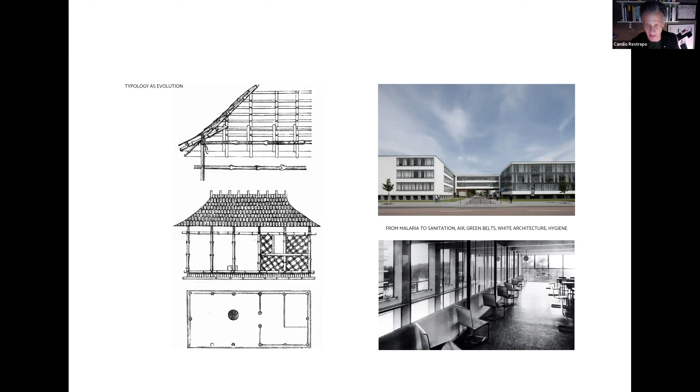At the end of the 19th century, the British troops in India and Asia were struggling, trying to fight malaria, coming from the Italian meaning bad air, or mal aria. This led to the first policies of hygiene and sanitation, which in the end turned out to be what we understand as the first age of modern architecture: white, air, green belt, hygiene, and this idea of architecture meant to heal, to be medical, let's say, to have this possibility. And it took place in the tropics.

So then there are two models that emerge into architecture at the early 20th century. On the left, the idea of igneous architecture that depends on energy basically by burning wood, which is the typical scheme of architecture of Frank Lloyd Wright, with the fireplace in the middle. And then on the right is the heliomorphic, the idea of the relationship with the sun, developed by Le Corbusier after World War II, in relationship with the movement known by many as tropicalism.

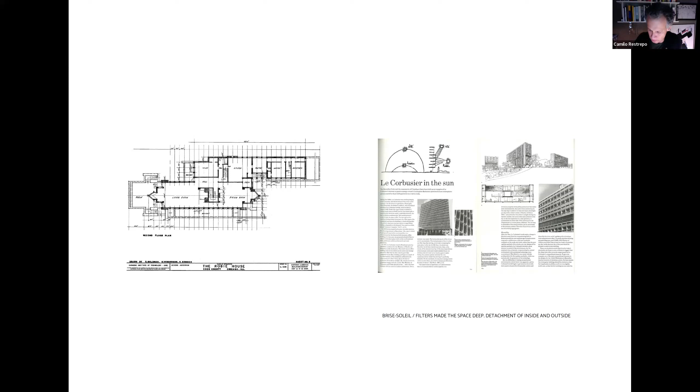Basically derived from the exhibition from MoMA from 1943 called Brazil Builds, where this idea of climate, weather, temperature allowed architecture to detach itself, the facade, from the interior, creating a mediating membrane and producing an expansion of space. Space went from being very thin, of glass and transparent, to becoming thick by the mediation of these elements, allowing this wide threshold to take place between inside and outside.

Tropicalism grew strong in the 30s and 40s around the world, to the point of this masterpiece by Carlos Raúl Villanueva, Universidad Central de Venezuela in Caracas, where all these filters begin to appear, very much in tune with the idea of the primitive hut we were talking about at the beginning, where there are just a few elements to contain and reflect on how to administrate the relationship of air between inside and outside, and what makes inside operate, or what makes an exterior take place.

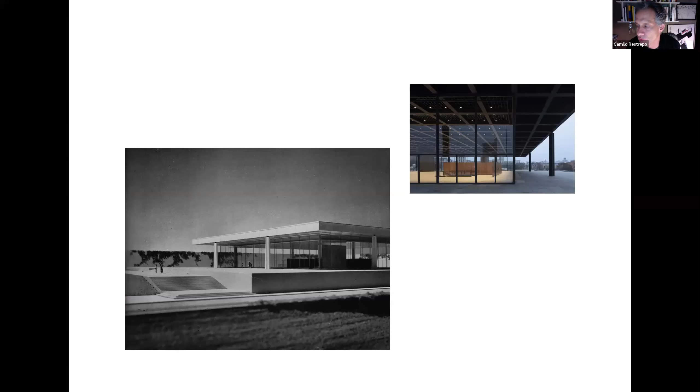With this movement, this idea of tropicalism expanded around the world. It was possible to see projects by Fry in Africa, leading also from the Center of Tropical Studies at the AA in London, even to Mies van der Rohe. It's unbelievable, but the project on the lower left is not the Neue Nationalgalerie. It's actually the Bacardi headquarters in Cuba. So who needs an overhang in Berlin?

So somehow I asked that question, also referring to a brilliant text by Francisco Liernur explaining the relationship between experts and vanguard architects that took place after the 50s, especially with the intervention of Team 10 and the members of CIAM, which I will go to in the next slide. But what's interesting is how this idea of protecting from the sun, of creating these spaces, these forms of transition between inside and outside, even permeated Mies van der Rohe.

So it created a new movement around architecture that wouldn't live long, because then with the emergence of Team 10, specifically after Bridgwater, the meeting at Bridgwater, the former members of CIAM—Le Corbusier, Sert, Gropius, and many others—had become experts. They were working for the US government, trying to expand their policies after World War II for reconstruction.

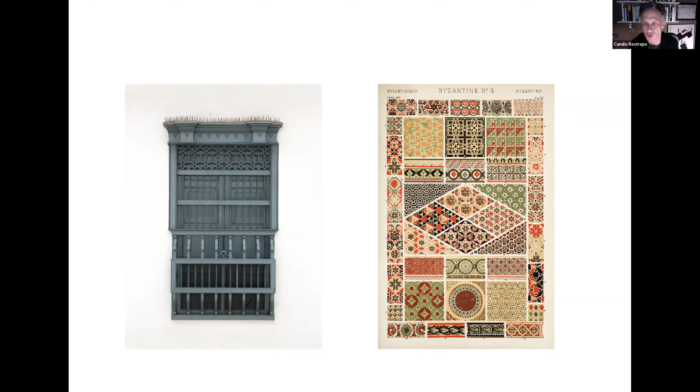And then this idea of the in-between, the space that is not inside, not outside, a dynamic threshold, which I think is the most interesting characteristic of the idea of tropical space.

Here are the characteristics that I guess we need to look at: the idea of the tropical space, that it's porous, dynamic, made of elastic limits, wide thresholds, multi-referential, structure is form, breathes naturally, space made by layers, primitive and archaic, is generous and public, designs relations in space and time, specific elements but ambiguous spaces.

It uses history to redefine the present, negotiates the boundary constantly, it's adaptable, keeping its spatial identity together, is not generic, and typology as an open document to negotiate history and geography. So taking that in mind, I will go very quickly through three of our projects.

First, positioning ourselves. I am positioned in the middle, trying to make a convergence of practice, teaching, and interest in the discipline through writing and research, but also with buildings, by making buildings.

For that, I work sometimes as a guest editor, as in the recent issue by A+U, by a great invitation by Seng Kwan and Angela Pang. On the right is the cover of the forthcoming book we are doing next fall. So I try to be involved in many different activities, not only in designing or building projects.

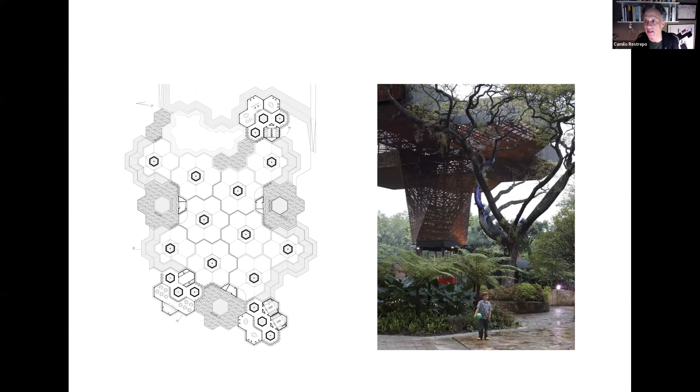The first project is the Orchideorama. It's a canopy located in the Botanical Garden of Medellin. This is a structure that we thought was important and interesting to understand as one module that we call the flower tree, which is this. It's a model of steel, a canopy that begins to negotiate the idea of inside and outside as an extension of a forest. It's an open public space, porous, allowing many different activities to take place.

The second project is a coffee wet mill, a place where coffee gets prepared before being roasted. We were looking at the vernacular architecture of the site, 100 kilometers southeast from Medellin. It's a simple box because it's an industrial facility, but inside we have nested a small community center.

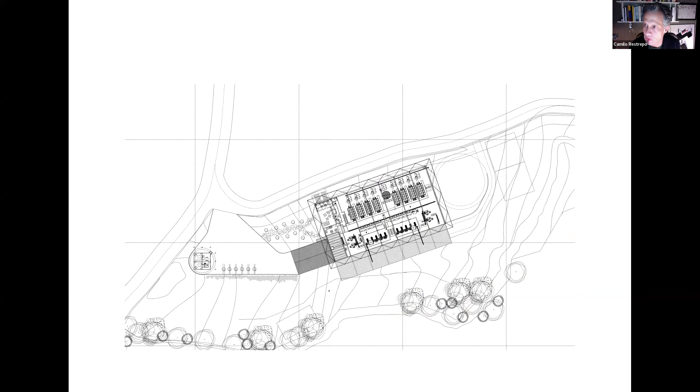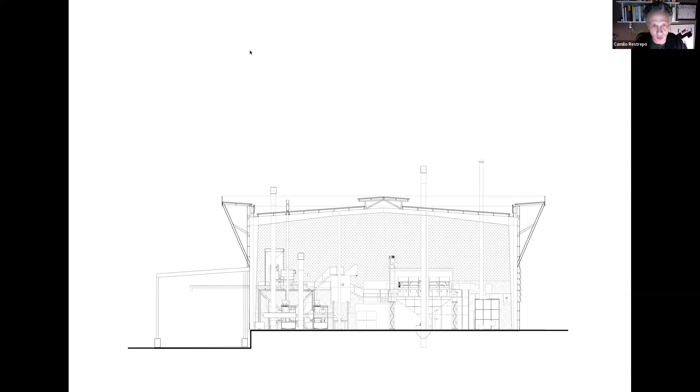This is a very simple section, from left to right and right to left: cold air goes in here and warm air goes out, because it's basically a damp fabric, a vapor fabric, while they dry the coffee grains. The project is also related to all this iconography I was showing you before, of how it was adapted.

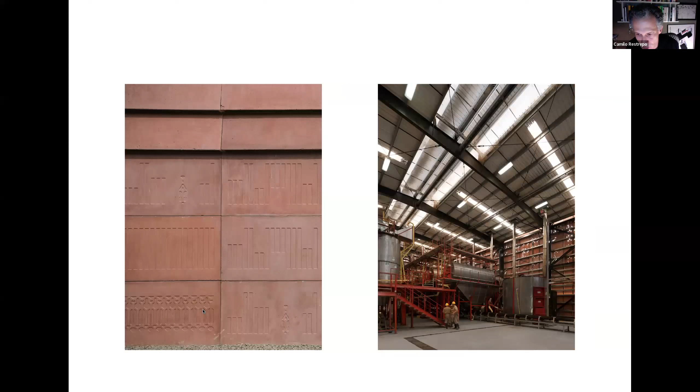With these elements and patterns from Owen Jones, the project is made of panels of GRC concrete, tinted red. On the left image, in the lower part, is the community center. This is the interior, where the air goes out. It's a floating facade, but instead of detaching inside and outside, it's made to breathe, to let the air go through. This is the patterns I was telling you about, and this is the interior of the factory.

The last project is a church in association with Dellekamp Schleich, from Mexico, in Jojutla, Morelos, after the earthquake of 2017. This was the most destroyed town in Mexico during the earthquake. This is what we found, shown on the image on the right: an old church from the late 70s, and some ruins from the 17th, 18th, and 19th centuries. So we had to reorganize the whole complex.

We thought it was interesting to mix two ideas: one, the type of the basilica, to have this connection with the history of a church, or this religious architecture. Also taking into account this typology very typical of Mexico, called the open chapel, that allows people to gather only under a canopy, under a roof, being very democratic.

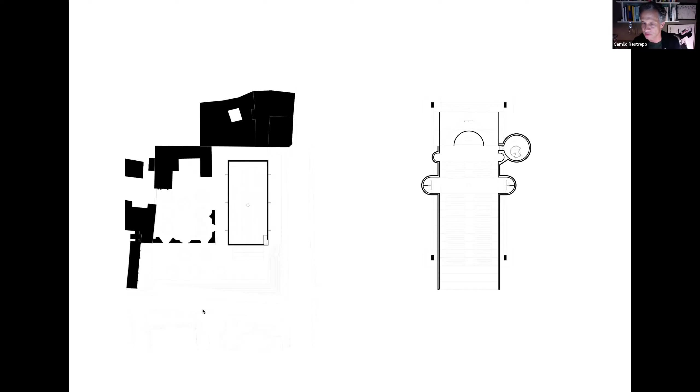Since it was the first infrastructure built in Mexico after the earthquake, we thought it was important to have the type of amphitheater to allow people to gather, not only for mass, but also to allow the community to come together again as a place for gathering.

So this is the church. The church is very simple. It's four columns made of concrete with vaults and arches. The outside, the floor and the ceiling are made of brick, and the structure allows people to be down under the same roof. It plays with the typology, allowing all the apses to be accessible for confessions.

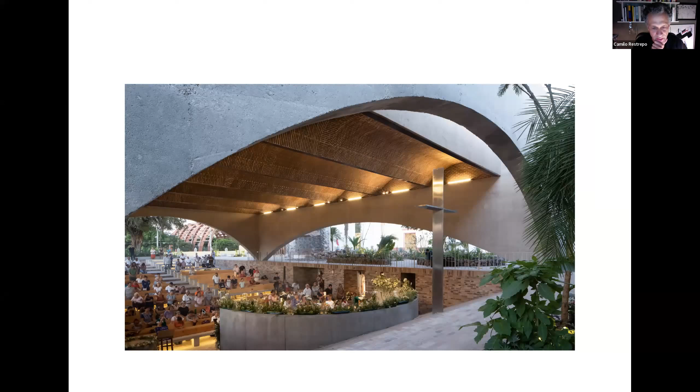As you see, the terrain goes down to allow not only a disconnection with the outside in relationship with the ceremony, but also to make it work as an auditorium, as I mentioned before. This is another view from the inside, showing how it is porous on all sides, and how all the events take place according to the different festivities in relationship with the ruin.

And yes, this is very much it. Thank you very much.

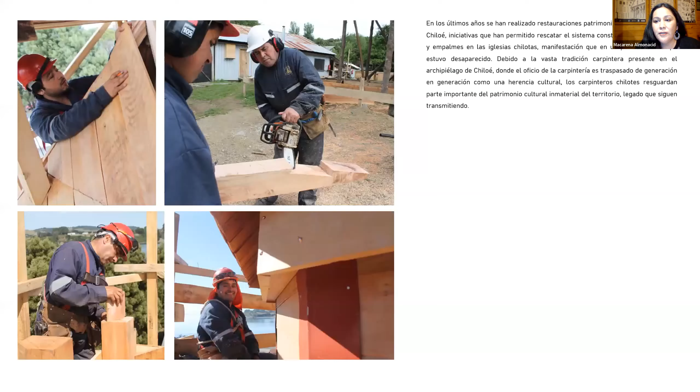Esta iglesia se encuentra en una isla muy chiquitita. Entonces aquí uno de los factores fundamentales fue el trabajo con carpinteros de Chiloé. Ellos son personas que han heredado el conocimiento de sus abuelos, de sus familiares antiguos, tíos. Son parte del patrimonio cultural inmaterial de este territorio, ya que manejan el lenguaje de este material que permitió dar pie a una cultura.

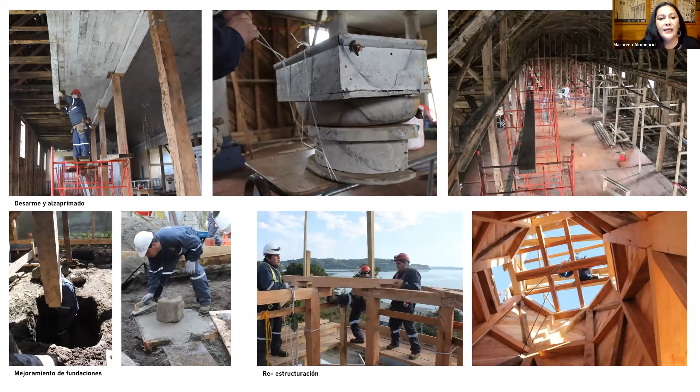Si bien el proceso de una restauración es súper técnico y tiene muchas etapas, nos vamos a enfocar más bien en el trabajo que se ha realizado con las comunidades. Pero acá pueden ver algunas imágenes de las distintas etapas que se desarrollan para restaurar edificios de este tipo, que parte trabajándose primero el desarme y el etiquetado y almacenamiento de todos los elementos que componen los revestimientos interiores.

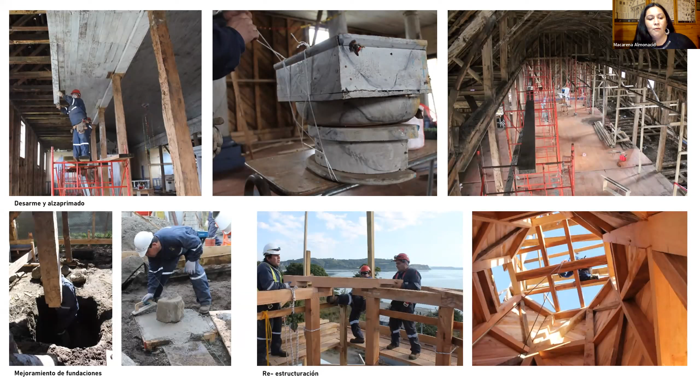Luego se alzaprima, se crea una subestructura para sostener este edificio durante el proceso de restauración. Luego se hacen mejoramientos de fundaciones y se vuelve a reestructurar el edificio. La mayoría de las iglesias en Chiloé tienen patologías asociadas a la humedad, hay pudrición, hay insectos xilófagos.

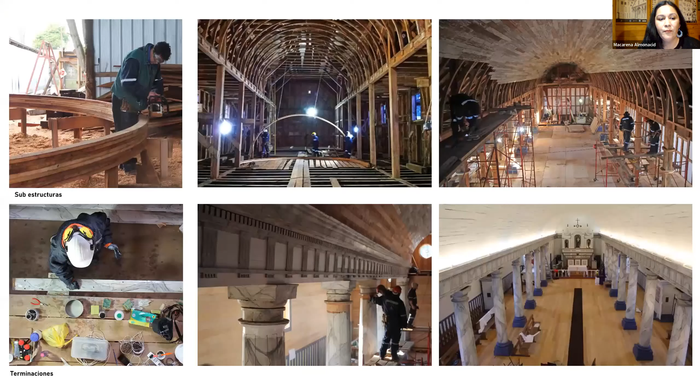Hay algunos elementos estructurales que, lamentablemente, por factores climáticos, porque en este lugar llueve mucho durante todo el año, no han sido subsanados a tiempo y tienen problemas que implican reemplazar una serie de elementos estructurales principalmente. Luego de que ya se estructura el edificio, se confeccionan subestructuras, principalmente las asociadas a la bóveda, que son estas cuadernas, estas curvas que van sobre la nave central.

Se trabaja sobre las pinturas originales, tratando de resguardar la mayor cantidad de elementos, principalmente de los revestimientos interiores, y luego viene la terminación.

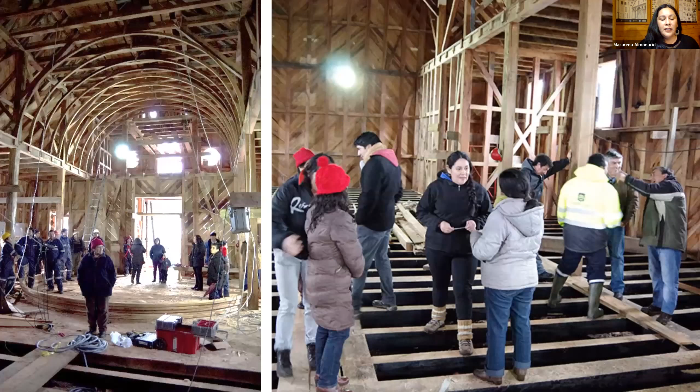Se hizo un trabajo con las comunidades donde ellos visitaban permanentemente la obra. Esta obra duró 2 años, y se iban dando cuenta de los avances de este trabajo. También iban generando una conexión, un vínculo con el equipo y con los carpinteros, que también son todos de distintas partes del archipiélago de Chiloé.

Por otro lado también desarrollaban actividades asociadas a la religión que ellos profesan, que tiene que ver con sus manifestaciones culturales locales. En este caso se hizo una misa, por ejemplo, durante un proceso de restauración, algo que no se había hecho en otras iniciativas de restauración en estos edificios. Y obviamente se mantienen las tradiciones, acá en una procesión, todo durante el contexto de actividades relacionadas con la restauración.

Acá hay un momento bien particular cuando se instala la cruz, donde se vuelve a reinstalar un elemento que es simbólico para ellos, y tienen la oportunidad de tocar el elemento, que tiene una carga simbólica para estas comunidades. Es un espacio de gran celebración.

Por otra parte, en el caso de la iglesia de Chelín, existe en este lugar un cementerio que tiene formas de casas pequeñas, que emulan una arquitectura tradicional civil, y es así la forma que tenían los antiguos, y todavía en algunos casos las personas en la actualidad, de enterrar a sus muertos.

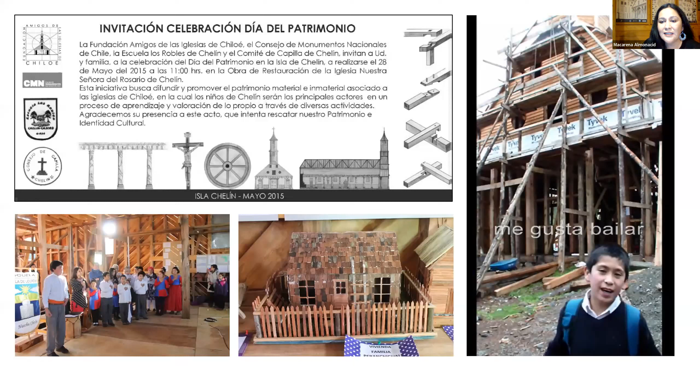Por otra parte, se hizo un trabajo directo con las escuelas. En esta isla pequeña había 2 escuelas con pocos alumnos: en una había 8 y en la otra 18. El trabajo que se hizo con ellos fue constante. Durante los 2 años los alumnos estuvieron presentes en todo momento en las distintas etapas de la restauración, vinculándose a los distintos carpinteros y restauradores que iban pasando. Se organizaron actividades para celebrar el patrimonio y la identidad local, y ellos fueron los actores principales dentro de este proceso.

Ahí pueden ver cómo desarrollaron una serie de iniciativas, desde la construcción de maquetas con los restos de madera que iban quedando de la restauración, dibujos, relatos; se hicieron muchas actividades, incluso algunas relacionadas con la identidad nacional, como en este caso un desfile de las fiestas patrias de Chile.

Ellos también fueron parte de un proceso interesante de puesta en valor de sí mismos, porque estos niños nunca habían desfilado en su propia isla pequeña, siempre iban a la isla grande a desfilar. Fue un espacio de encuentro con sus papás y vecinos, porque los niños aglutinaron el interés de sus padres por darse cuenta del gran valor que tiene un edificio posado en el lugar donde ellos viven. Fueron entendiendo progresivamente el valor identitario de mantener estos edificios. Finalmente esta restauración se cierra con una manifestación local y una gran comida comunitaria para todos.

Por otra parte, acá voy a mostrarles otro ejemplo de otra metodología, impulsada por mi querida colega Caterina Araya, con quien llevo muchos años trabajando pensando cuáles son los mejores métodos para intervenir estos edificios desde el punto de vista de la identidad local, donde se rescaten estos elementos identitarios y a las personas que viven en estos lugares les haga sentido que esto se preserve en el tiempo y que participen activamente. Esta es la iglesia de Ullar Bajo.

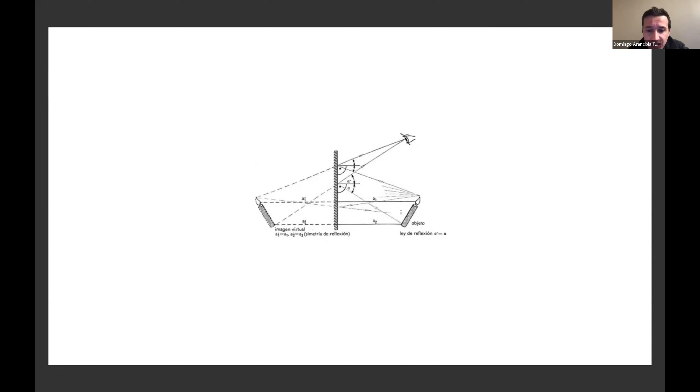What I'm interested in talking about today, and perhaps through the sample of some works, is to see that mute way of the dark side of the moon — we can see it in that way. I select 4 projects, 2 pavilions and 2 constructions in Pomaire. Each of them has an opaque side that gives rise to the project. It can be from the material, social factors, the process, or from our experience. And all these factors are the ones that affect us as project variables.

The first one that I will show will be this Cochayuyo pavilion. Cochayuyo is a Chilean macroalgae that we presented through the Young Architect program in Chile. In this case, there are three variables that I'm interested in addressing: on the one hand, the social variable, which has this productive activity of Cochayuyo and its history with Chile; the material factor, since there was no greater research and incorporation of the use of this seaweed in habitable space; and finally a project variable, where a series of interests helped us shape the information.

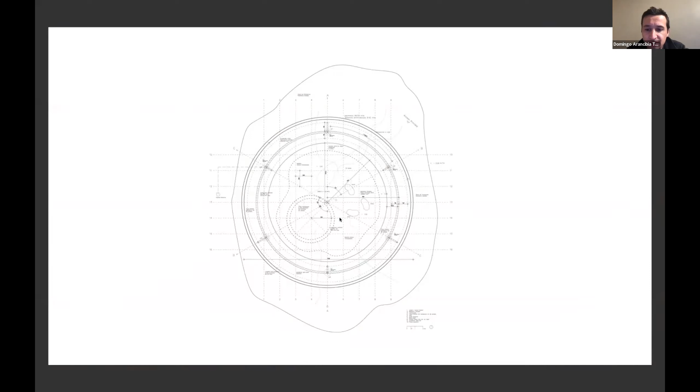We can see certain variables of the process that are not known, such as these drawings. We received more like 4 tons of Cochayuyo, and we had to tighten each one of them with a team of more than 20 people between architects and volunteers, because it would have been impossible to do this work without the collaboration of so many people.

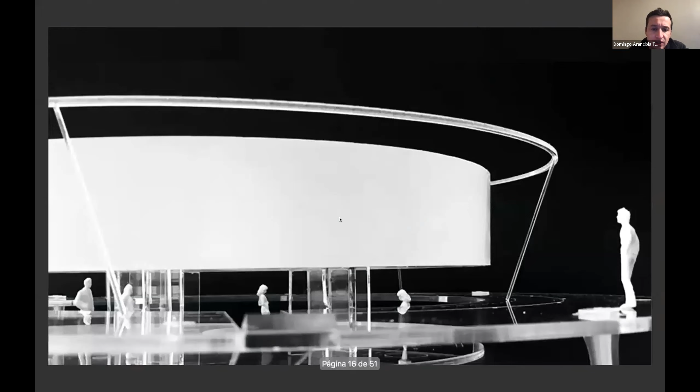And these are some images of the project, like the mirror — this is the process images. That's the light of Cochayuyo. That was the name of this pavilion.

The following is a second pavilion that we were commissioned at the end of 2020 to commemorate the 170 years of architecture education in Chile.

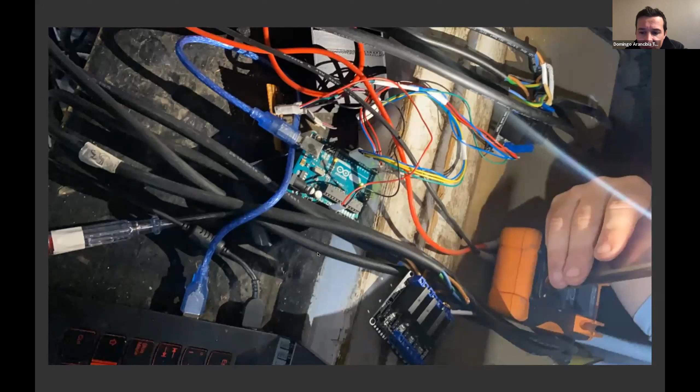The opaque beginning of this project was from the reflection when we asked ourselves how to incorporate the history, varied change and years in a single construction. These are some drawings about this pavilion.

What remained hidden about this project was its technological development. We proposed a lightweight 500 meter fabric that weighed 1 kilogram, suspended by what we called air pillars, thanks to more than 20 fans connected to an intelligent electrical matrix.

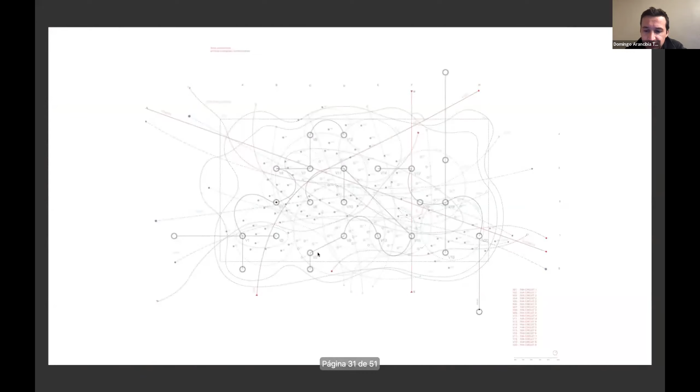So whenever there was not enough natural air to lift this blanket, the fans were turned on and communicated with each other through an intelligent electrical matrix. These are the results, some models that we already made.

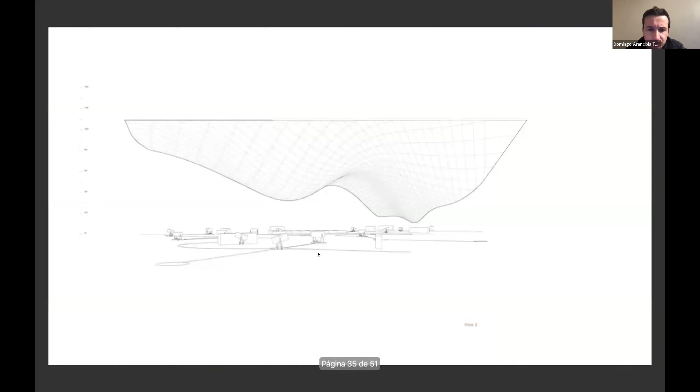Finally, I want to show you two works that we are doing in Pomaire, a Chilean craft town characterized by pottery in clay.

The first of them is Casa Fuego, or Firehouse, a space where you can eat, visit, and look at the landscape. This project has the principle of rescuing the use of fire in the manufacturing process of the clay pieces. In Casa Fuego, we propose to use burning and fire to give color to the volume.

And this is some results of the project.

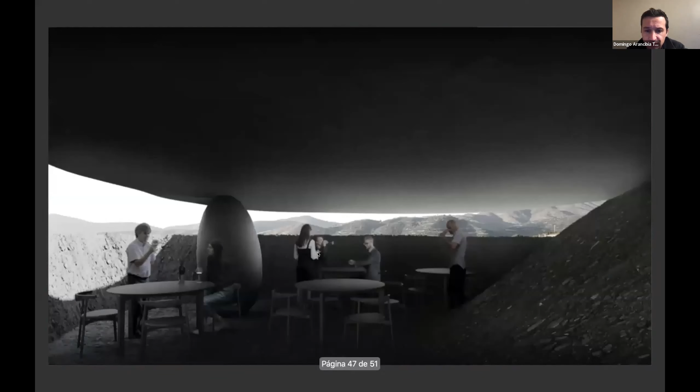To finish, I want to show you the new School of Pottery of Pomaire that we are making together with Taller Barros. It is a single volume of 10-meter radius where we rescue the air and the shell of the clay craftsmanship through the arrangement of an inflated molding, giving rise to this volume capable of housing many people who will go to learn this traditional knowledge.

So finally, I believe that this type of construction linked to education is fundamental for the correct preservation of our culture and our heritage here in Chile. Thank you very much.